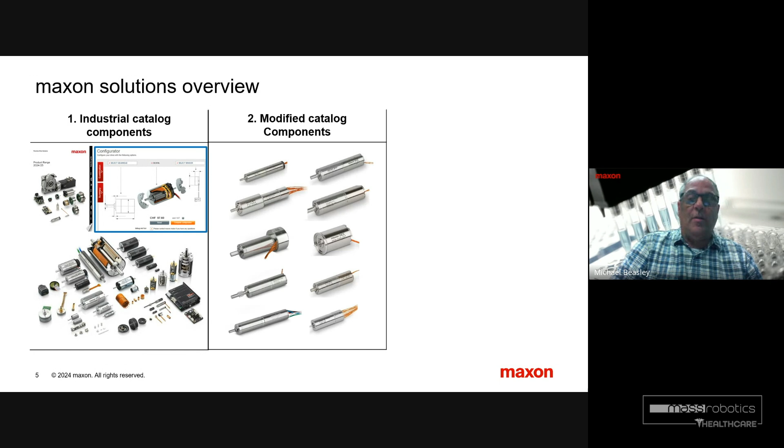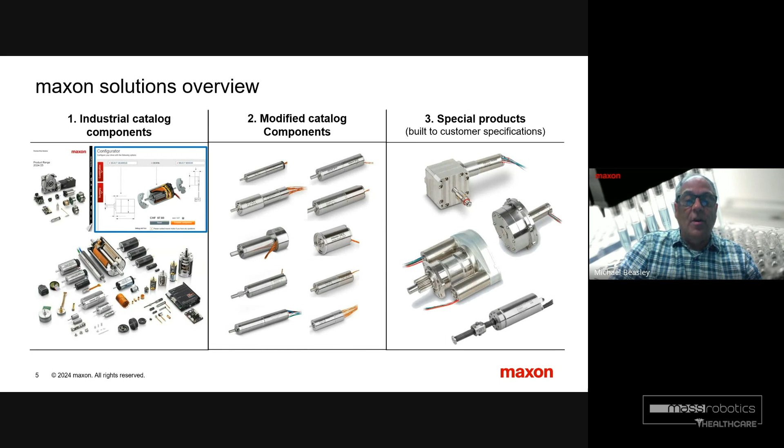A general overview, again, we start with the requirements and go back to the product that's the most applicable. But when we have a problem or a challenge from our customers, we'll typically start with our base product, our commercial off-the-shelf COTS product, and we'll build on that first in more of an assembly, a complete assembly, and then a solution that's integrated, a mechatronic solution. We'll typically start with our base product and build to your specifications and get to our final solution.

We have 4 major markets. Industrial automation is where lab automation is, and it includes pretty much everything other than medical, aerospace, and mobility solutions. And I have that whole market in the US. Sandro Walter has lab automation in Switzerland, so he's very specialized.

Yeah, welcome everybody. As Mike said, I'm Sandro Walter. I'm here based in Switzerland and responsible for global business development, specifically on laboratory automation. So today's webinar is about how the workflow in the laboratories can be optimized by using the right drive system, advanced drive system solutions, like Mike explained, in order to increase, for example, accuracy, efficiency, and scalability in the lab.

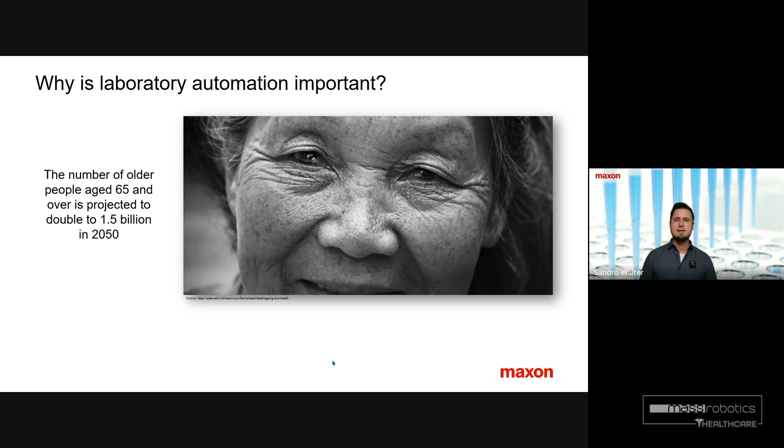But so why is this still important? So the labs today are still faced with rising requirements. For example, a study conducted by WHO predicts that by 2050, over 1.5 billion people will be aged over 65. This increase, combined with chronic illness, new drug developments, and new viruses, means that labs have to process more and more tests and therefore also automate more and more steps. At the same time, the labs are faced with staff shortages, rising costs for the buildings, and this makes automation even more essential. But there is also a reproducibility crisis in research.

A study conducted by Nature in 2016 found that 70% of researchers in the laboratory are not able to reproduce others' results, and 50% were not even able to reproduce their own results. This again highlights the importance of having very precise, accurate instruments and laboratory instrumentation automated, in order to prevent errors and avoid manual steps.

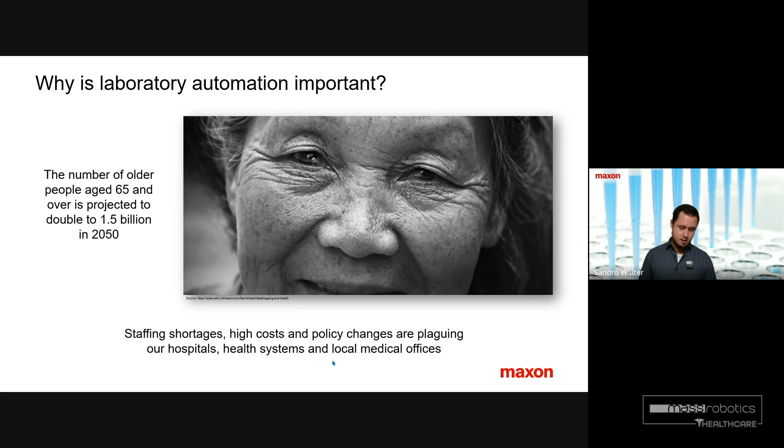These pressures on cost, quality, and other points mean that more has to be automated, and automation isn't just an option anymore, a nice to have. It's actually getting more and more important and essential. So what are the challenges in the laboratory today? We're going to go a bit into that. By our work with our customers who are instrument manufacturers, but also by understanding the market, we gain a lot of insights into what challenges the end users of these instruments have in the hospital, research labs, and so on. But the issues that we identified are not isolated issues that we saw.

It's also confirmed by a study conducted by Agilent that confirmed these challenges in the laboratory. First, there is a higher demand for high throughput and productivity in the labs. They have to process hundreds, if not thousands of samples a day. And this means the instruments have to process the samples faster and the steps in between have to be automated.

And then also workflow efficiency, again, about how quickly and easily the workflow is in the lab with the individual instruments. And what we see is that more steps get automated in between instruments, like mobile robots moving samples from one instrument to the other, if you don't already have a total laboratory automation instrument.

And then also there is the downtime and maintenance issue. When one of those key instruments fails during operation, this causes costly delays in the workflow and disrupts critical testing in clinical trials, for example, or other steps. So this means you need to have reliable instruments where the components hold long.

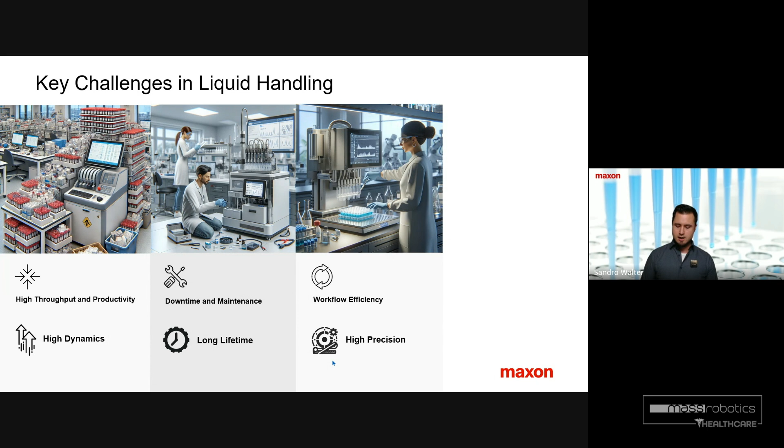And then, as said, workflow efficiency is very critical. It's very important that these individual steps are performed accurately and precisely, and therefore also it's important to use, for example, high resolution encoders for your motors in order to be able to dispense, for example in this specific case, very precisely.

And then lastly, as well, space constraints. What we see is, again here as well, that the instrument manufacturers try to shrink the footprint of their instruments. For example, for the pipetting channels, we see a trend towards 9mm thick channels instead of 18mm thick channels in order to reduce overall footprint, and then for the whole instrument as well. So these are the challenges we see in this application.

But now let's focus on one specific case where we see how we've helped the customer improve his application. The liquid handling instruments typically have 4 axes: X, Y, Z, and pipetting. The X-axis moves the channels individually from left to right or back and front, and the Y-axis from back to front. The Z-axis is responsible for moving the pipetting cassette up and down, and the pipetting axis does the dispensing of the liquid, sucking it up and dispensing it down to a range of nanoliters.

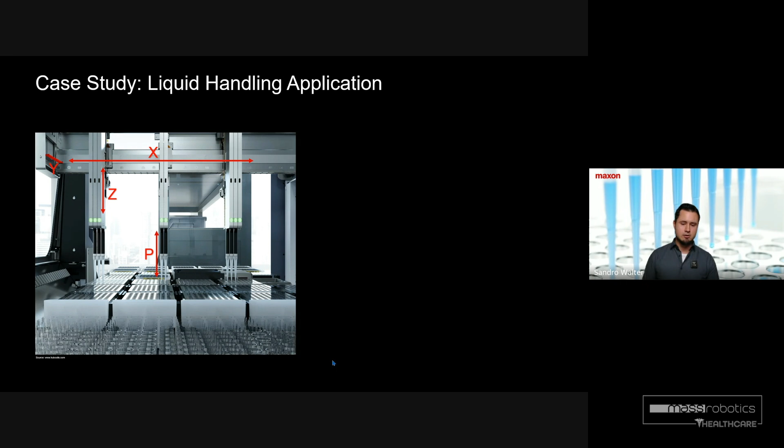In this specific project, it was about the pipetting axis, and the goal was to have a thinner channel, a smaller footprint, a 9mm thin channel, but also increasing lifetime of the instrument, reducing downtime, and having a high precision system capable of dispensing liquids down to nanoliters while still being able to dispense up to 1 milliliter. Lastly, high dynamics was very important in order to increase the throughput of the instrument.

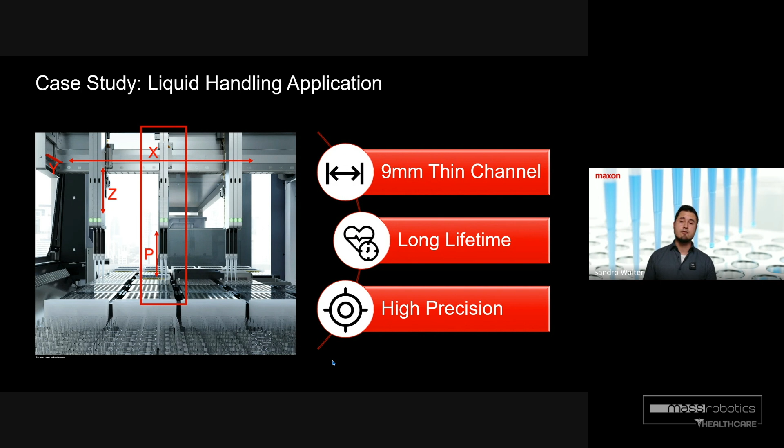Let's have a look at how we worked together with the customer. The collaboration started with a request from a customer for a 16mm motor and gearbox. But because we knew the requirements for the axis, for the syringe piston pump in the channel, and we knew the trend in the industry is towards 9mm thin channels instead of 18, and we saw that an 8mm motor could also handle the load, we recommended going to an 8mm motor that allows for a 9mm thick cassette.

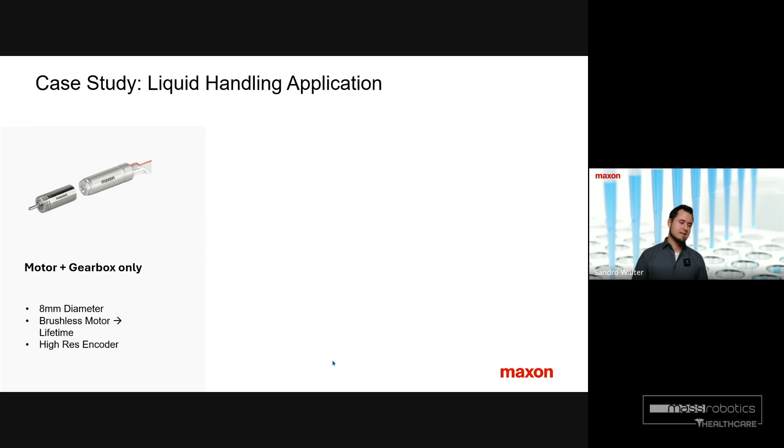Also, because of the lifetime, we recommended using brushless motors. And because of the very precise dispensing with small volumes, we recommended using a high resolution encoder.

Then when the partnership evolved, we also offered to integrate a lead screw into the gearbox. This offered the advantage of having fewer assembly steps, no coupling needed of the lead screw to the output shaft of the gearbox, resulting in fewer parts. The overall length of the assembly was also reduced, and the customer would get everything from one single source.

We also knew that long lifetime is very important - you don't want your instrument to fail. So we came up with the idea of using a ceramic lead screw instead of steel. With the ceramic lead screw, the lifetime gets extended, performance is better, efficiency is higher, and there's less wear and friction. Also, you don't need any lubrication, and this helped increase the overall lifetime.

Lastly, the ceramic lead screws could be produced at Maxon in-house because we have the capability to produce ceramic parts in-house. We sent both versions to the customer, who did some lifetime testing and was very impressed about how much longer the lifetime of the instrument is with the ceramic lead screw version.

Most of you may think ceramic is much more expensive, but in this application, steel lead screws often need very special coating, also because of lifetime and friction. Therefore, the ceramic lead screw is not much more expensive, and the benefits justify the slightly higher price. So that was how we worked together with a customer.

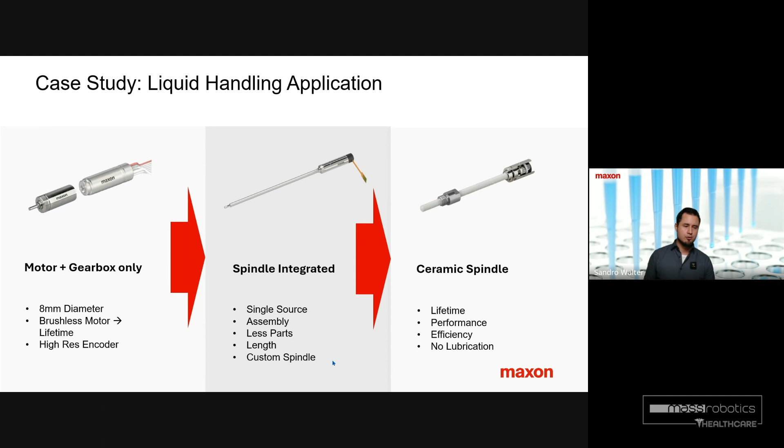Now let's move on to the next example, which is about centrifugation. The centrifuge is a key part of many lab applications, for either clinical diagnostics or pharma research. It's used for separating biological samples, refining chemical mixtures, and preparing those samples for further analysis. We all know that making these machines work effectively requires a reliable, high-speed, stable performance.

In this section, we're going to talk about the technical challenges we see when designing a centrifuge and choosing the right drive system for it. The most critical thing is to have high speed, very precisely, because this speed creates the necessary centrifugal force to separate components, for example plasma from blood. If your speed isn't precise, it can influence the result of the separation.

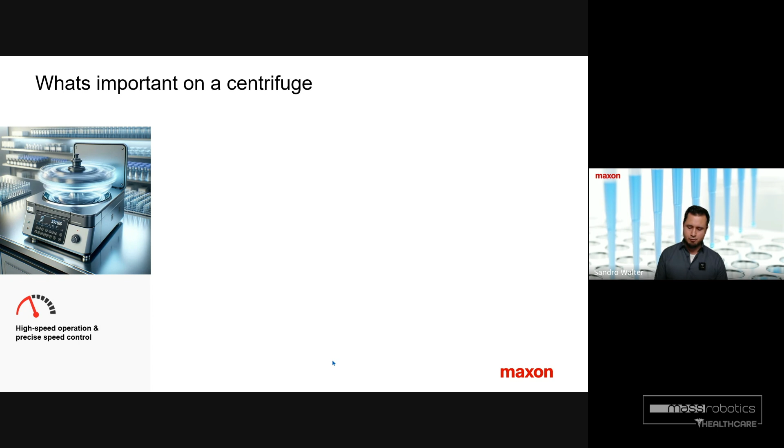The next thing is noise and vibration. We know centrifuges can go up to hundreds of thousands of RPM; some are just in the 10,000 RPM range or 5,000. But with a rotor at such high speed, that generates a lot of noise that can come from imbalance of the motor, from commutation, and other sources. So it's very important to have a well-balanced system and reduce vibration and noise.

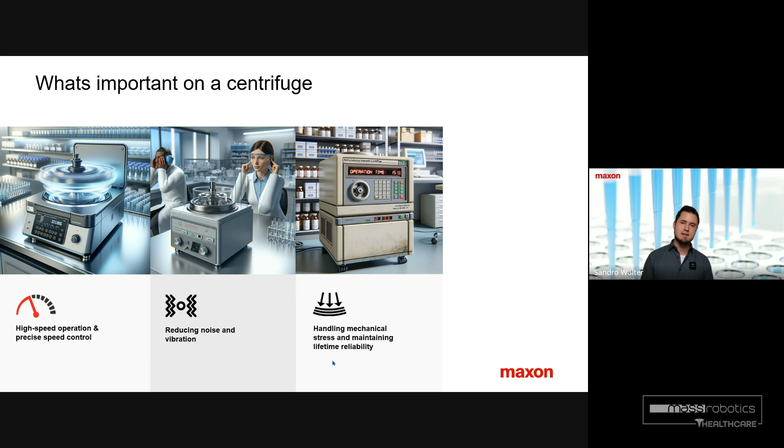Then there is the mechanical stress that comes with such high centrifugal force. Obviously, if you have such high speed, you're going to have a high load on your motor or rotor of the centrifuge, and the motor needs an appropriate bearing system that can handle these high loads.

Lastly, ramping up and speeding up the acceleration process is not required on many centrifuges. They ramp up very slowly, even over hundreds of seconds or tens of seconds. But if we talk about throughput in the laboratory, it's key to be able to increase the speed to your desired level quickly and decelerate quickly as well, because then you can manage more samples within a given time, which increases the efficiency of the lab.

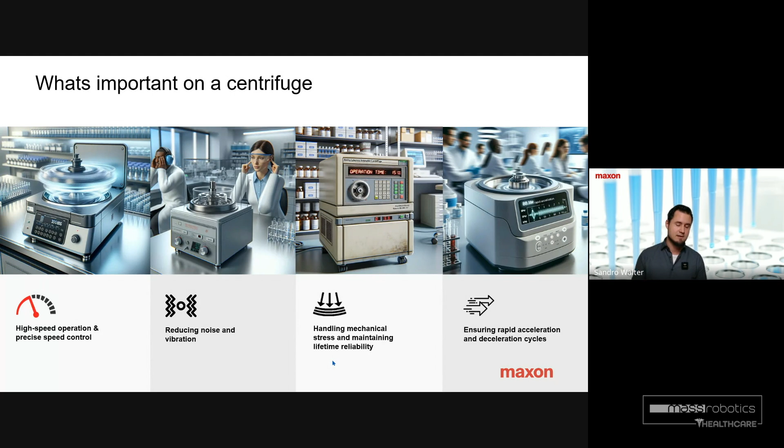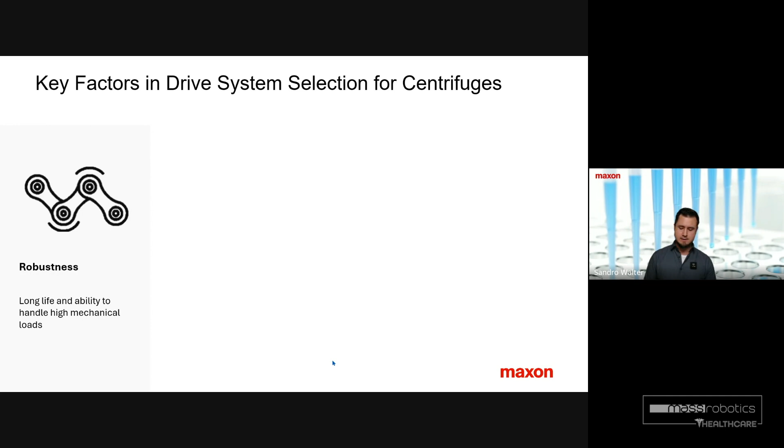So what's important when you consider a drive system for these centrifuges? First of all, you need a very robust drive system that can handle very high speeds and loads, with a good bearing system that can handle this mechanical stress.

Also important is good thermal management. You also need high torque, because when you have samples in the rotor, and the rotors are typically very heavy, you have to ramp up to the desired speed, and this requires high torque. But once it's spinning at speed, it doesn't require that high torque. So if you have a motor or drive system with a high thermal time constant, you're able to overload the motor for a long time before reaching the speed. That means you could potentially choose a smaller motor, which means a smaller centrifuge.

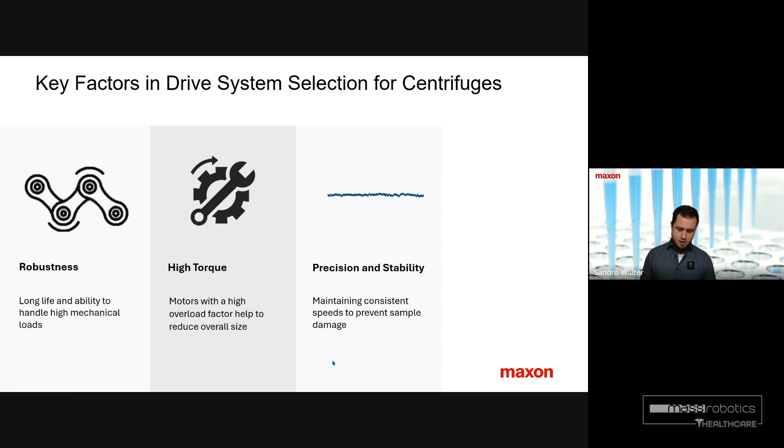Then there's precision and stability. It's important to maintain this speed. What helps there is, for example, having a motor with high rotor inertia, so the speed is more stable. If you have low rotor inertia, it's more sensitive to changes. Also using a high resolution encoder so you always know the exact speed.

And lastly, low vibration is something we all understand is very essential - achieved through high quality bearings, precise motor control, and other points.

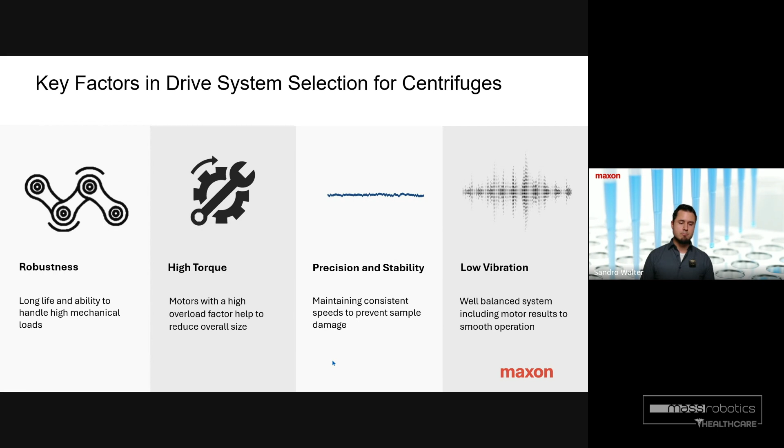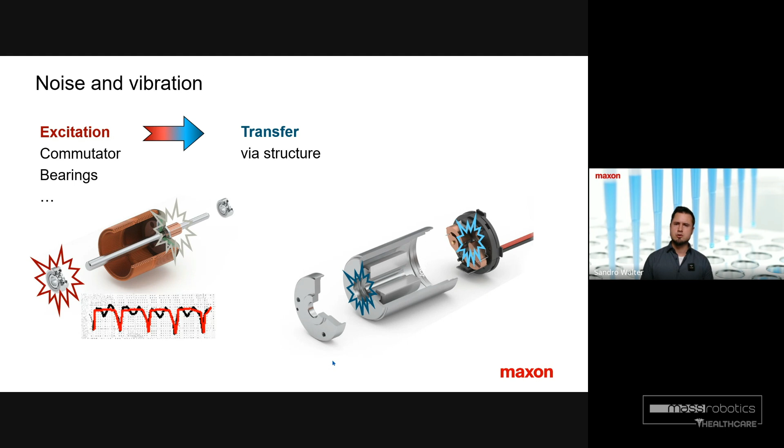Managing this is very important, so let's focus a bit more now on vibration and noise. Where can this noise and vibration come from? There are multiple sources within a motor that could cause noise and vibration - for example, the commutation system in a brushed motor, the commutation frequency of a brushless motor, the bearings, the teeth in the gearbox, and electromagnetic sources like PWM. These noises get transferred through the structure - the housing of the motor, gearbox, or mechanical design of the centrifuge - and then emitted. They act like an amplifier, like a loudspeaker, and the noise is emitted.

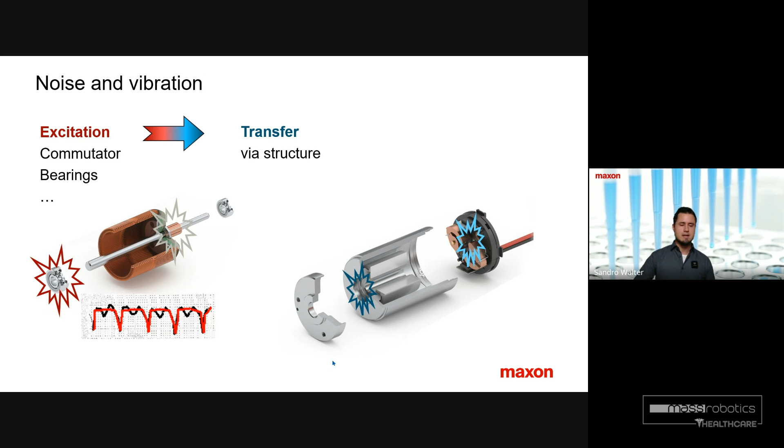So the question is, how can we reduce those noises and vibration in the whole system? There are multiple ways you could do that.

For example, you could use dampening elements such as silicon pads or rubber rings, among other parts, in order to reduce the noise at the source and avoid these resonances.

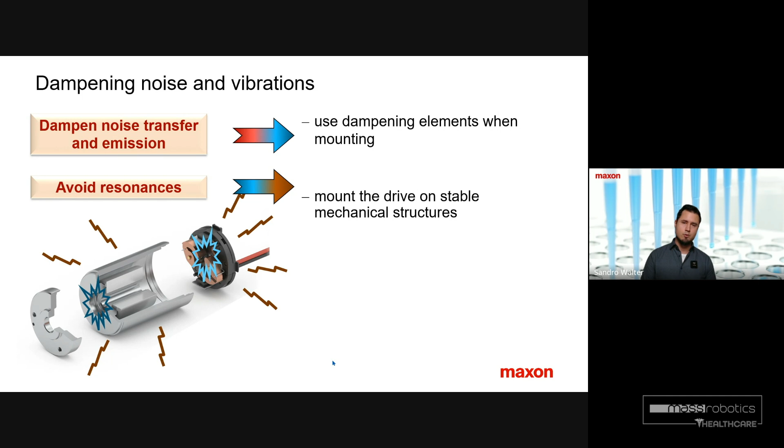You can also mount it on a stable mechanical structure, choosing the right material - thick-walled material instead of thin-wall, which causes membrane effects. That helps reduce it. There are also other ways to reduce noise, like a well-balanced motor, reducing friction, and reducing the PWM frequency on the electromagnetic side.

Also, commutation-wise, instead of block commutation, a field-oriented control with sinusoidal commutation makes it run way more smoothly and therefore generates less noise.

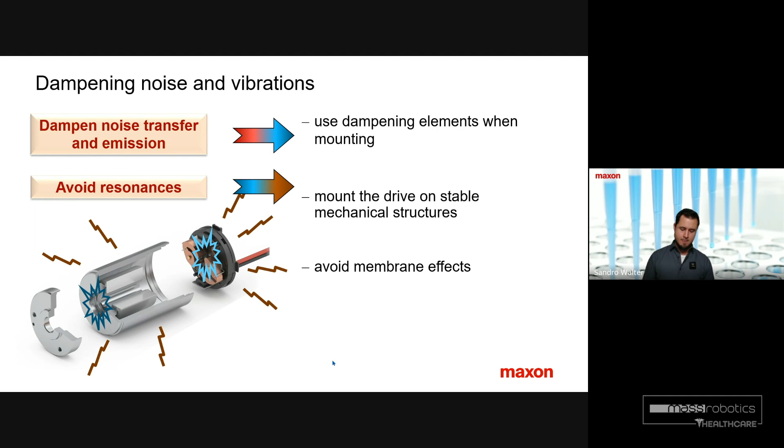But for now, let's go into a case study and how we worked together with a customer to help solve these issues. It started with a high disturbing noise at the commutation frequency of 2.75 kilohertz.

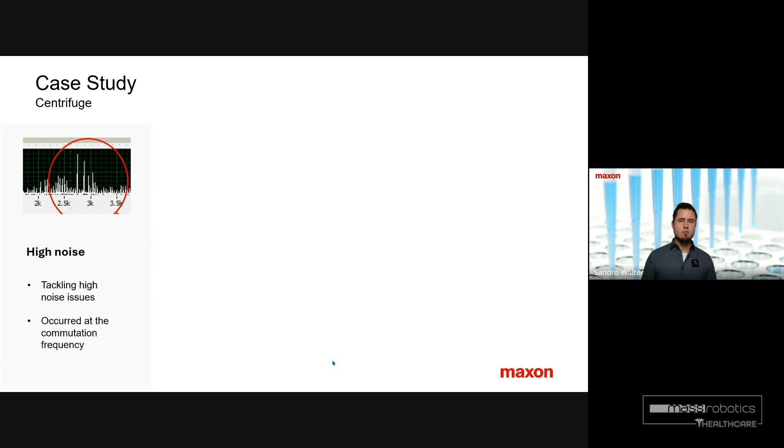Together with the customer, we added a silicon pad to decouple and dampen the noise in the application. But because the bearing design had to be changed due to the high loads of the centrifuge, this was no longer an option - there was no room to add these silicon pads.

So we thought about it, because at the same time we were developing a new speed controller with sinusoidal commutation instead of block commutation.

And we knew the customer was using block commutation. And as you've seen before, sinusoidal helps to reduce the noise. So we recommended using a sinusoidal speed controller instead of block.

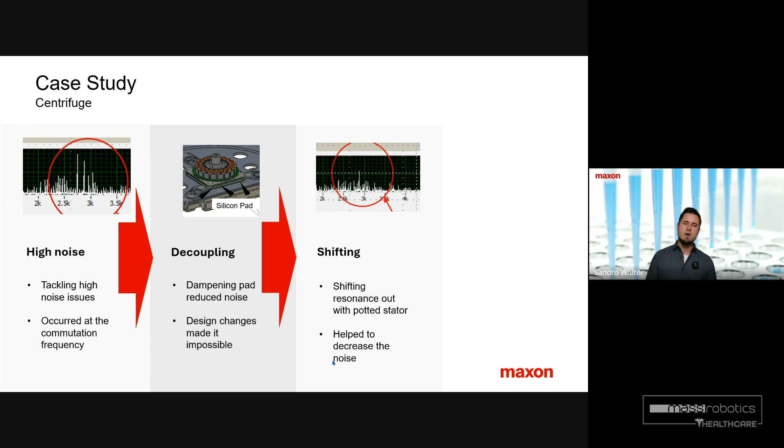We performed some testing in-house here at Maxon with a test fixture provided by the customer, and compared a potted motor stator with block commutation versus sinusoidal. The results were impressive — the noise disappeared, and the customer was very happy that we managed to fight it at the cause instead of just shifting or reducing it slightly. We were able to remove it.

So these two collaborative approaches show that it's very important to understand the goals of a customer and the industry in order to recommend the right products to solve these challenges. So how can we help you on your next project?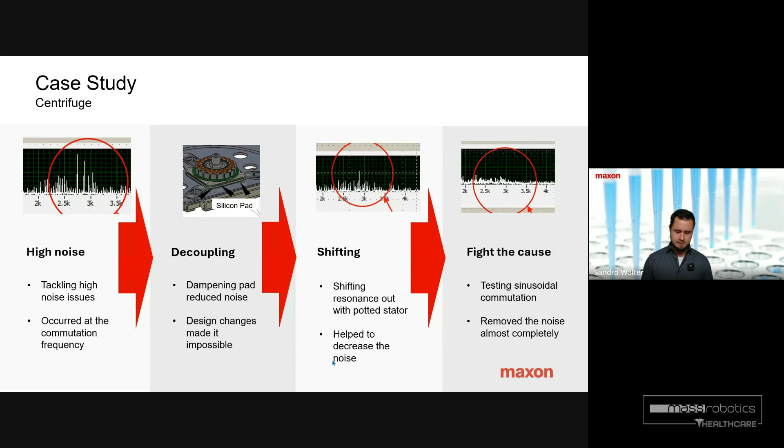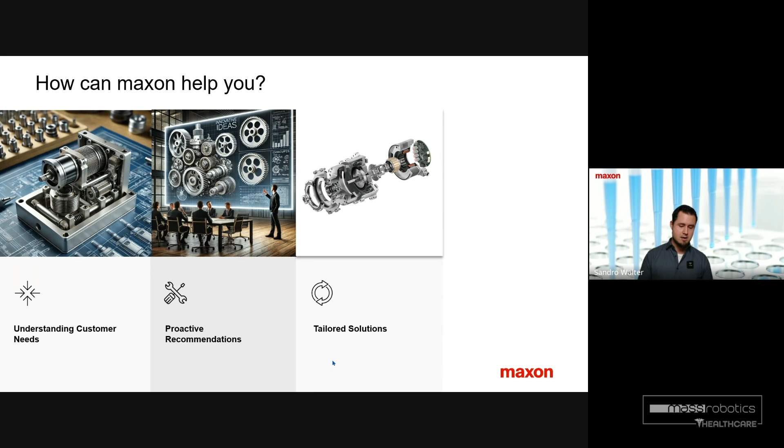We believe the key for success is understanding the application of the customer and the industry trends, so that we can proactively bring in new ideas, recommendations, and changes to what was asked of Maxon, and then design a tailored solution to the application. Like Mike mentioned in the beginning, we want to have a tailored solution for the specific application. That's our approach, and it helps solve these challenges, especially in laboratory automation.

We are also a reliable partner over the whole process. Ideally you get involved very early in the project so you can bring in design ideas and changes early. Then over the whole project, we work very closely with our customers to ensure that everything is going well.

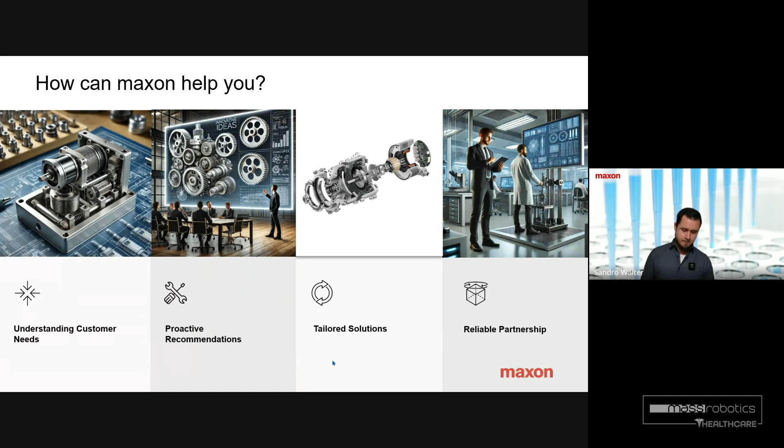So to wrap up today's webinar, thank you for joining. We hope we were able to give some valuable insights into how close collaboration with customers and understanding the market and trends helps design the right solutions and solve technical challenges. We look forward to collaborating with you and finding the right solution for your application. Thank you.

Thanks, Sandro. Thank you, Michael. Great presentation — I definitely gained some new knowledge and insights into the whole process. So thank you for sharing that. We have a few questions here, and I want to take a little deeper dive into some things.

My first question is, what factors influence Maxon's decision to target lab automation as a key market? What did you see? What was driving that direction for you?

I've shown the challenges and what that means in terms of requirements. In this market you need products of high quality, instruments, long lifetime, high reliability, precision — and these are values that Maxon has at its core. That's where we come from: high quality components, drive systems with high reliability. I think that's one of the main reasons why we've been in this market for a very long time. In fact, our 10th customer in Maxon's history was one of the customers in this market.